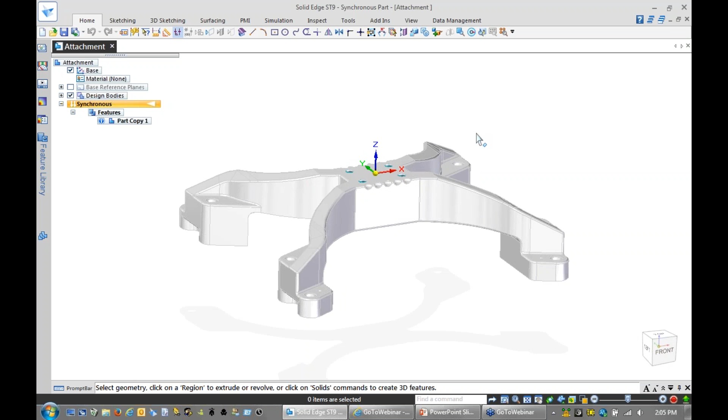This time I'm going to open a Parasolid file. Regardless where it came from, you can download it from an internet source or get it from a competitive package. You can see as we open this body, we don't have any features. It's a featureless solid body, what we call a non-parametric body.

The first thing we want to do, since we want to analyze this body, is assign material. And it's quite easy to do in Solid Edge, as you're probably aware. You can right-click on material and assign material right away, or you can go into the full material table.

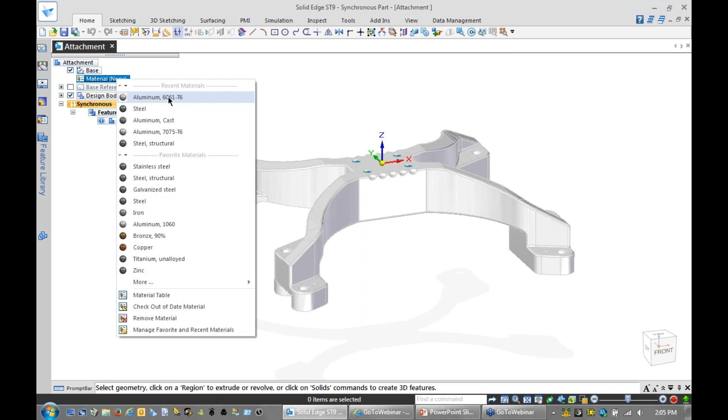Once we assign material with all the coefficients suitable for analysis, we're ready to start analyzing our part. But there's a little caveat. If you know a little bit about analysis, usually the model comes in not very prepared - a lot of small features like tiny sliver faces or geometry might have some problems the way it was built.

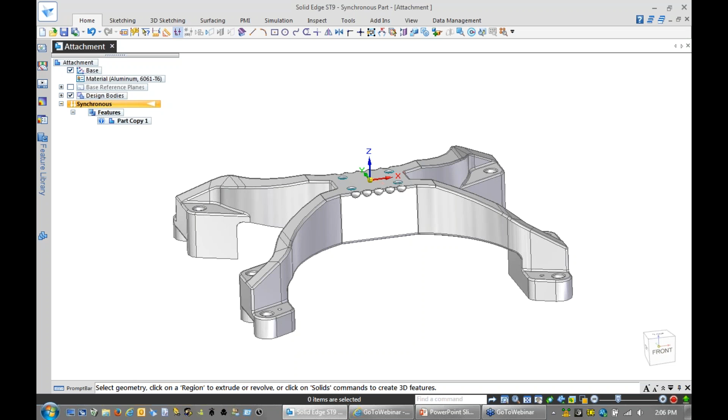Solid Edge provides excellent tools that allow you to quickly and efficiently get rid of all this extra geometry if you need to. Specifically with Synchronous technology, we can select all this extra geometry we want to get rid of and hit delete. We're pretty much done. What about all these radii around?

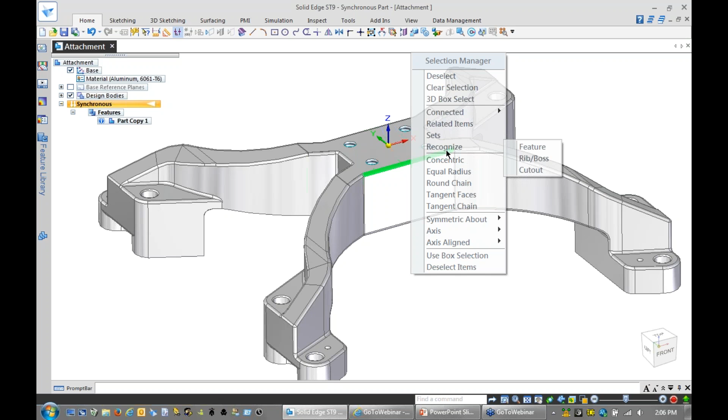Selection Manager comes to rescue. If you are familiar with Synchronous technology, you know it allows you to pick connected faces, sets, and recognize different features. Specifically, features that Solid Edge considers features, even though we don't have a feature tree, like all radius of equal value - we can select all that and immediately get rid of it in one single shot.

Another aspect of analysis is that the goal for every analyst and for engineer or designer using Solid Edge simulation should be to minimize processing time and get the geometry as clean as possible before starting the study.

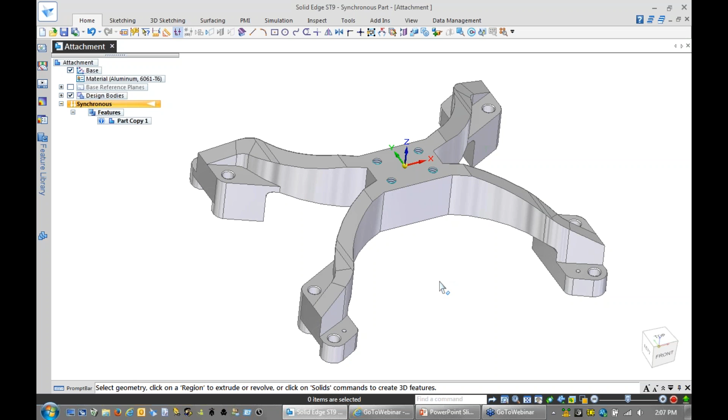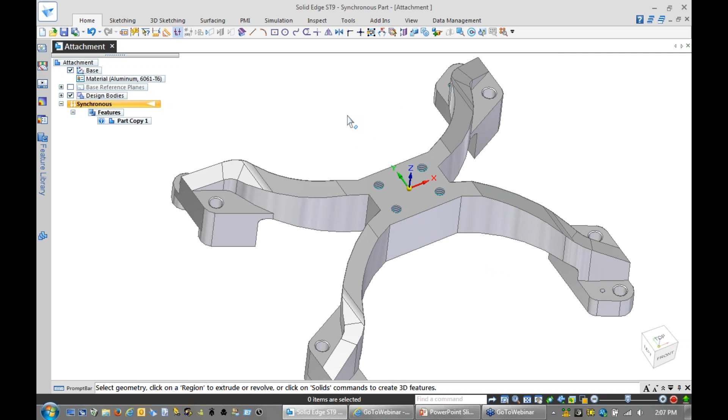If we're talking about this bracket, when you look at it, you might notice that it's symmetrical - and I mean symmetrical not only in terms of geometry, but in terms of how we're going to apply the load. If the load is applied to all 8 holes around the bracket and it's held by these 4 holes, we can consider it symmetrical in terms of analysis as well. This gives us the idea that we can analyze only a portion of it, and it's rightfully so.

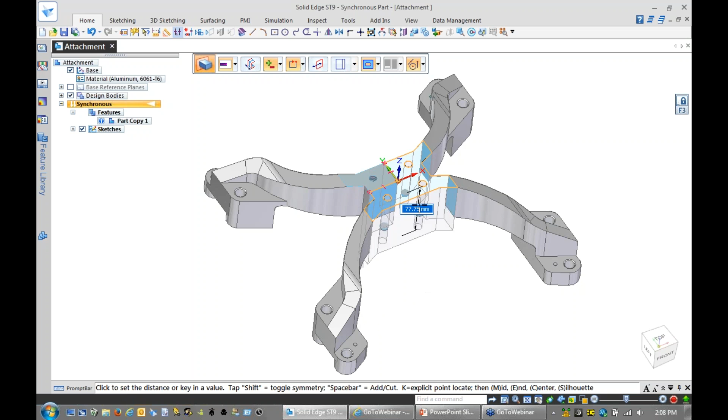So what we can do here is just analyze only a portion of this design. With Synchronous technology, it's really easy to get rid of extra geometry. I could select that region, and with the grab and go approach, you can actually switch between close and open profile. If I keep it on close, you can see when I start moving my cursor using the steering wheel, it cuts through the part. But if I switch to open profile, you can get rid of all the geometry, even though it was an open profile.

Another area is this little chamfer on each side of the hole - maybe we don't need that. Again, Selection Manager comes to rescue. By the way, if you didn't know how to invoke Selection Manager, you just hit Shift Spacebar on your keyboard, and it allows you to pick geometry, immediately taking you to the Selection Manager window.

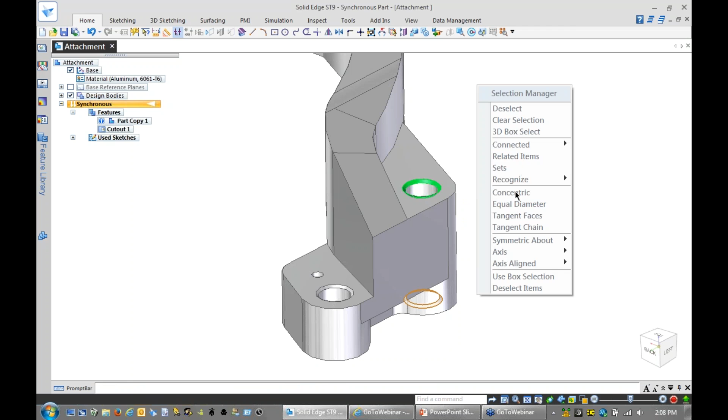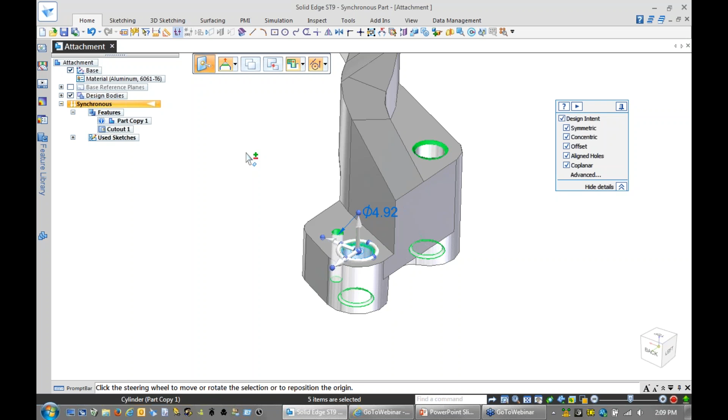So we can select concentric, and you can see we can select again using the quick pick tool. We can select this cone and again use Selection Manager to pick concentric. When we're done, we can hit Shift Spacebar again to get out of that mode, add maybe this small hole also into the equation, and get rid of it all in one single shot.

I mentioned that sometimes geometry doesn't come very clean, and as a result of surfacing modeling in some other packages, you can see that we have this patched bunch of small faces. That face is not smooth - it's kind of patched up. So we can fix it really easily.

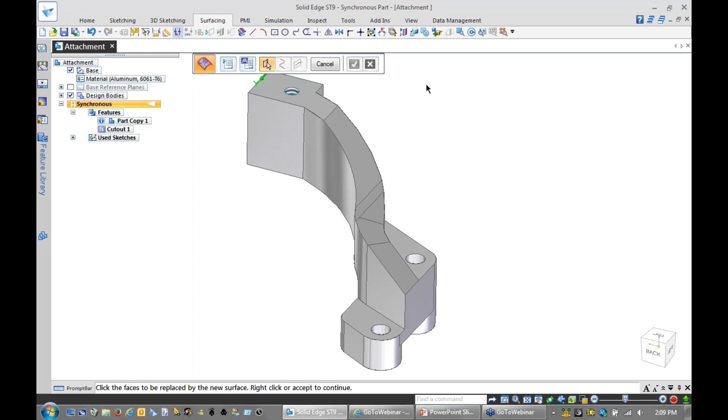Okay, and the final step—again, Synchronous technology is a very efficient way to deal with your geometry. If we want to get rid of that step, just select that small face and move it up.

So now that we've prepped the model for analysis, we can really start analyzing this design. Solid Edge Simulation is tightly integrated with Solid Edge, so right here I'm not leaving the environment—it's one single integrated environment.

Right here in simulation, I can create a new study and set up all the parameters for the study. And by the way, to give you some ideas, we can have designs analyzed in linear static mode, normal modes—which is frequency analysis.

We can do linear buckling, and also steady state heat transfer, with a combination of all of the above. When it comes to mesh type, we can have tetrahedral mesh for solid bodies, surface mesh if we're analyzing surfaces, and general bodies or mixed mode. It's a very efficient way to analyze, and I'll show you later how it works.

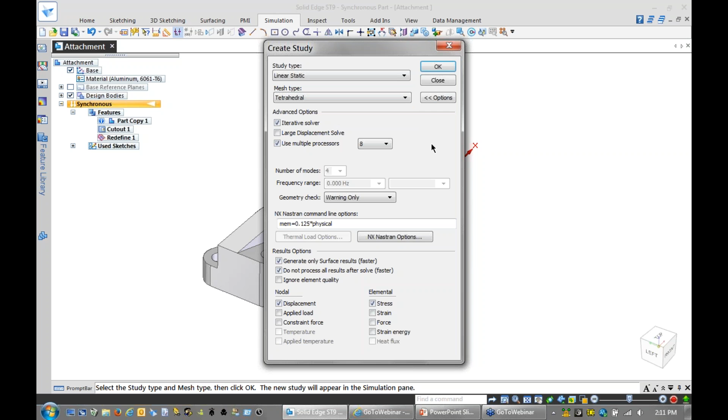For now we're going to go with tetrahedral mesh. And by the way, to increase real estate for me to work with, I minimize the toolbar up top. You can do the same if you prefer, or not—you can keep it up.

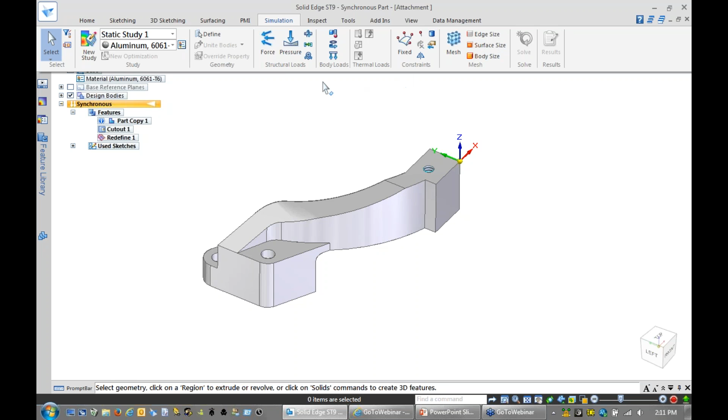The simulation tool is really easy to use. You progress from left to right, logically moving from defining loads, defining boundary conditions and constraints, then defining mesh, and finally solving. We can start with defining force.

Since we're analyzing only a quarter of the real geometry, we want to give it a quarter of the real load. So if we consider this whole bracket to be under 1,000 newtons of force, instead of 1,000 we can go with 250 newtons.

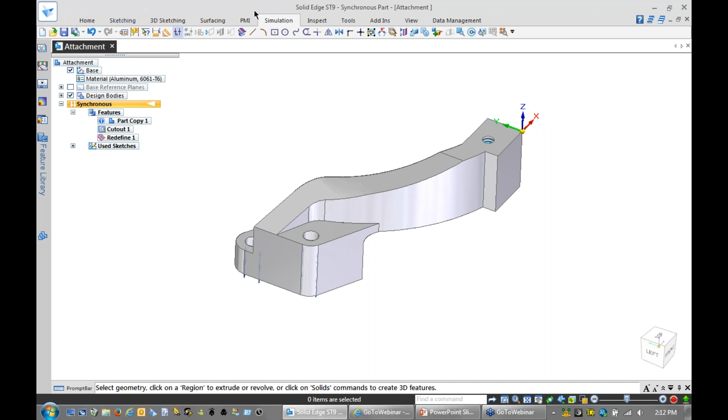Another way—simulation is very flexible when it comes to user interface. Instead of relying all the time on this toolbar, I can open the sidebar and access it this way. I prefer this way because it gives me more real estate to work with. You can do pretty much the same thing here.

We already applied load—we can see that load. As far as constraints, you can apply different fixed constraints, pin constraints, sliding along surface, cylindrical, and user-defined.

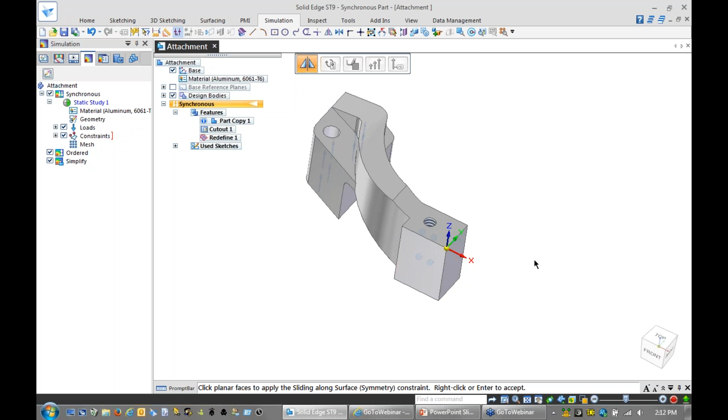In this case, we're going to fix this bracket against this threaded hole. And because we're analyzing only a quarter of our design, we need to apply constraints such as sliding along surface, because this will let the system know that this quarter of our bracket will behave and be analyzed as part of the rest of the bracket.

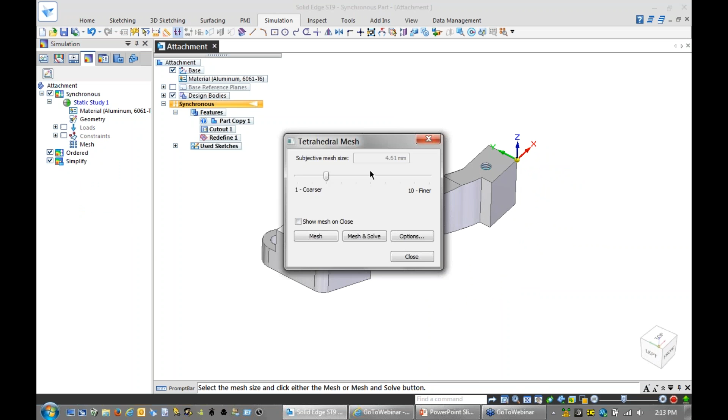This face and this face, defined this way, give the system the idea that this is only part of the whole design. Finally, we can do mesh, and conveniently the simulation tool offers you a way to mesh and solve in one single operation. If it's a simple model like this, it obviously makes sense. If it's more complex, you can first define mesh and then go and solve it.

So immediately after the system processes the study, it brings back results into the post-processing window. This is a very important part of every FEA package, and Solid Edge Simulation really shines here.

First of all, you can look at the results in many different ways. Right now we're looking at smooth contour, meaning the color mapping progresses smoothly throughout the mesh. We can switch to banded contour when it's more pronounced. Then finally we can look at element contour, where every element of the mesh is assigned a specific solid color.

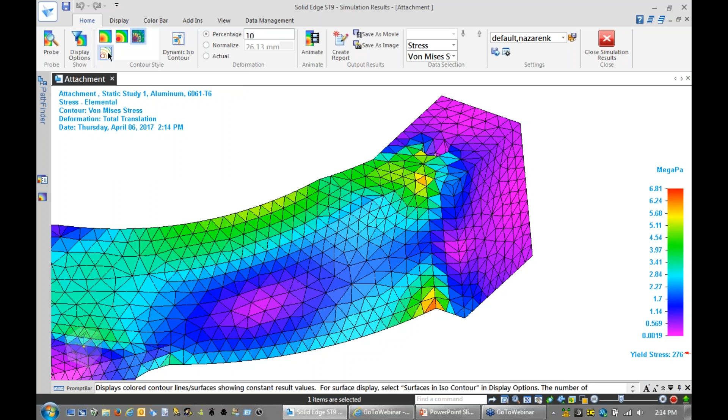And finally, my favorite—ISO contour. This gives you a really good idea. I can even switch to dynamic contour and go through results dynamically.

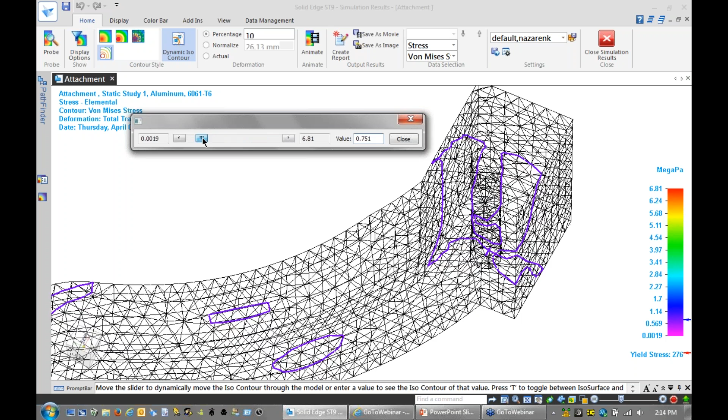So I can see where my highest stress is. As you can see, I can immediately see the distribution at the same level of stress, or I can go and see where my lowest stress is. This is a really great tool to quickly look at the results.

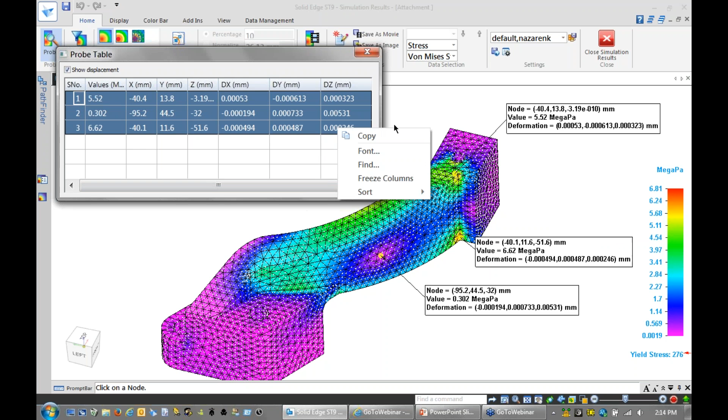Also, we can probe our design—you can select pretty much any node and include even displacement. If you turn on this option, you'll be able to get results for displacements, and all this information, by holding shift, you can select, copy, and paste into, say, an Excel spreadsheet. It's a very good way to preserve information for future consumption.

You can animate the results, because this gives you a good idea of how stress actually affects your model and how it will behave under stress. You can adjust—right now it's exaggerated, with the deformation percentage set to 10.

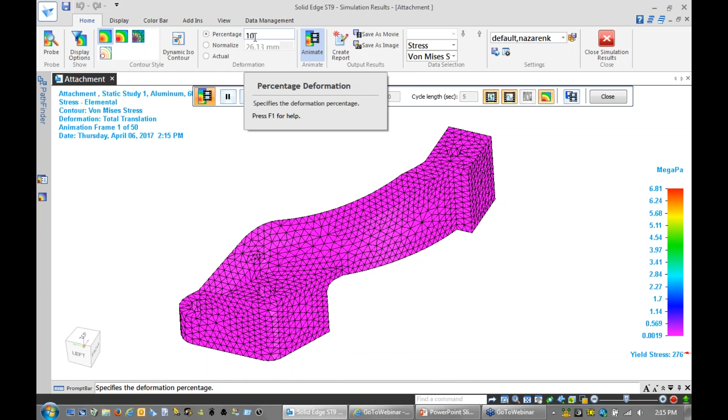You can go to actual, and this gives you actual deformation. You can save it as a movie if you want. Really user-friendly, it's really a powerful tool.

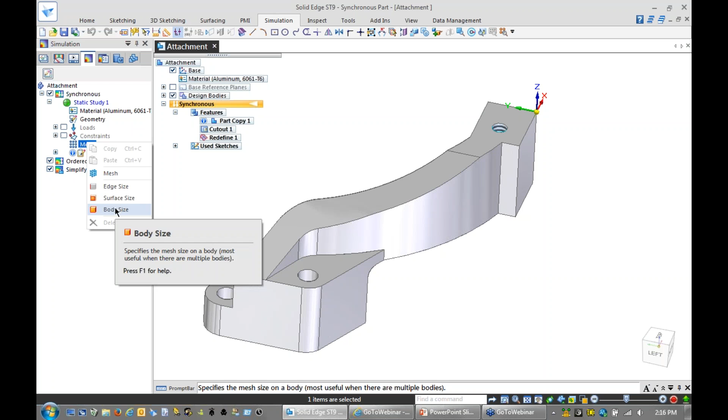So let's go back. Next step, I want to show you a more advanced technique to get more accurate results. A lot of analysts like to fine-tune their mesh, and that can be accomplished in Solid Edge Simulation as well. If I go under mesh, you'll find these extra options: edge size, surface size, body size. This allows users to fine-tune the mesh.

Let's say if I go with edge size, I can define how many elements I want along this particular edge. I can pick all the edges I want to apply this parameter on, and then define how many elements I want along those. So 24, and you can see how it gives me a nice dynamic preview if I accept it.

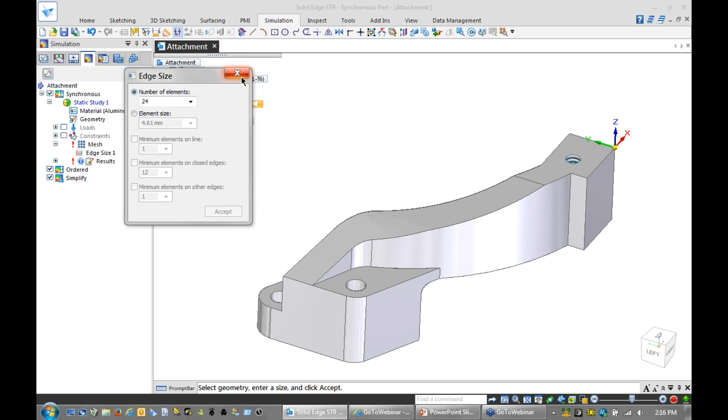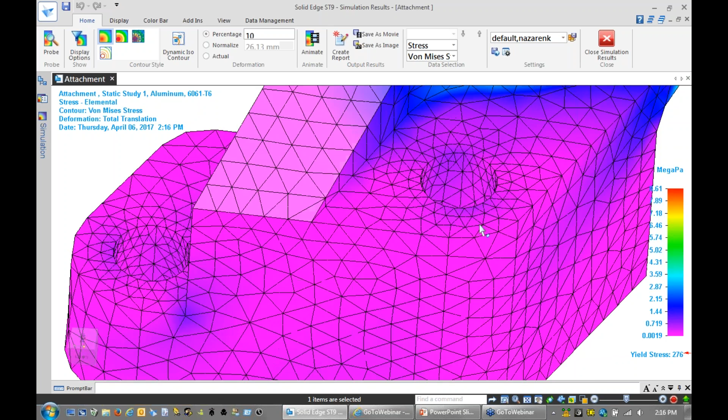So what happens now, if I go mesh and solve, it will take into account that setting first, and then it will go with the regular slider for the whole model. If you take a look at the results, you can see how nicely Solid Edge Simulation progresses from coarser mesh to finer mesh around the stress concentrator. So you can see for yourself how nice of a job it's doing automatically.

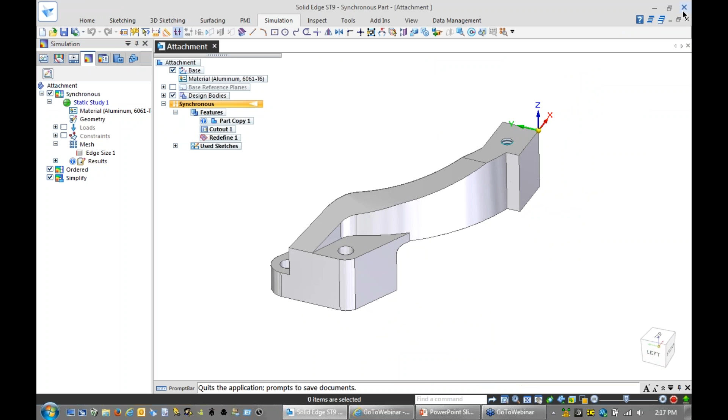Okay, so we covered some basics: how it works, how you set up your study, how you get results and analyze them. Let's go take a look at the next topic I promised to cover, a specific example. Let's close this and open the assembly.

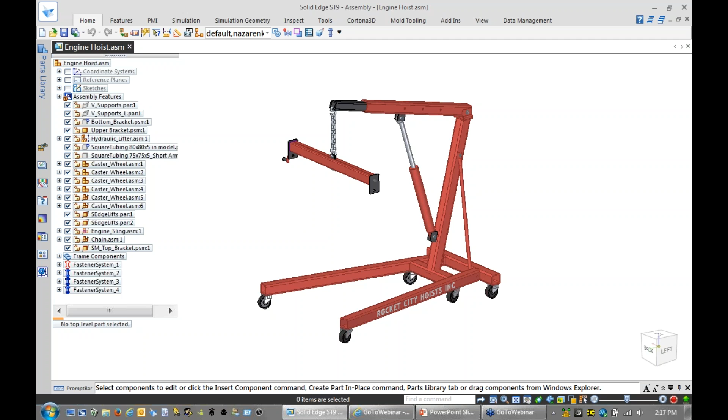I'm going to be working on an engine hoist assembly, and we're going to analyze this. Obviously, it's very important to analyze this structure because the company making this kind of equipment is liable if anything happens. So it's very important to make sure the product is reliable. Liability is a big issue out there.

So with Solid Edge, you can quickly isolate specific components on the screen that we need to analyze, in this case a member of this frame. And if we go into the environment, which is the frame environment,

simulation is present there as well. And when I create a new study, it allows me to actually do beam analysis. Instead of dealing with geometry, you will see how it happens.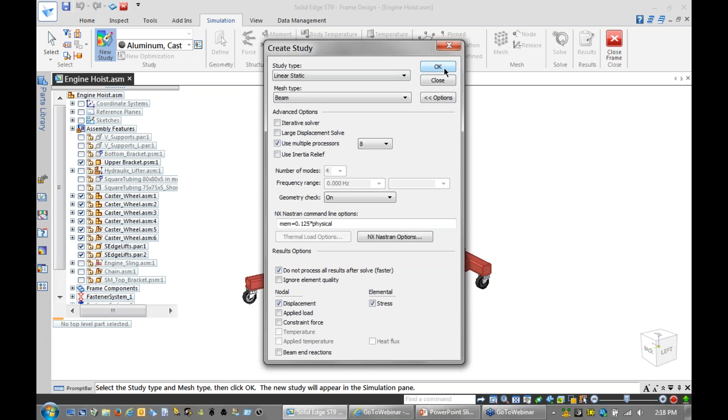When I create a new study, I can select all the members of this frame, and the system will give me this nice linear representation of every member, regardless of geometry complexity.

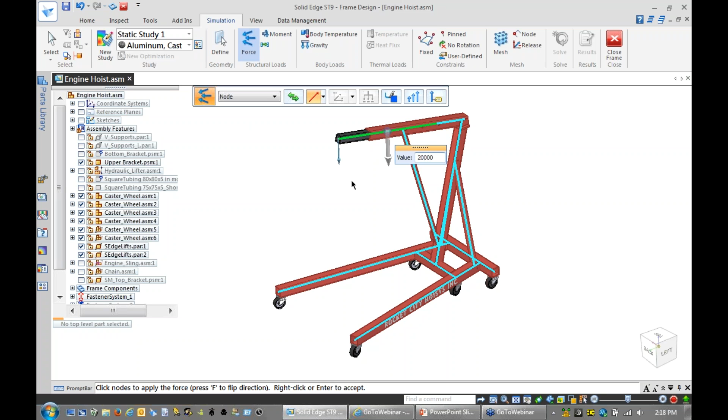So now I can apply force, and by the way, force can be applied in this case to the whole curve, distributed, or to a specific node, to the point. This is a 2-ton hoist, so we're going to apply 20,000 newtons.

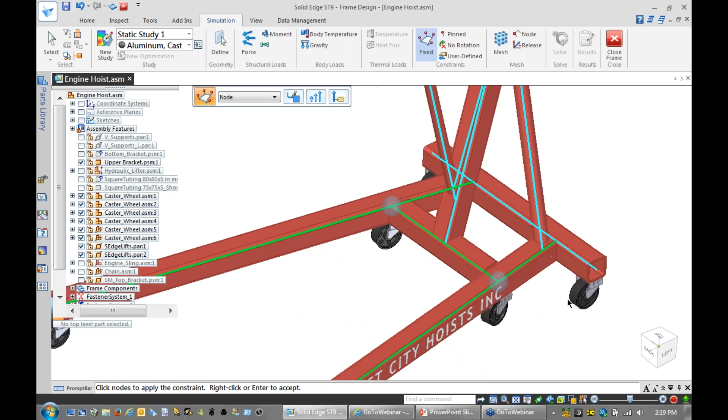And as far as fixing it and analyzing against, conveniently I can switch to node. The nice thing about the interface is you don't have to precisely select the point. If you're close enough, you can see I just get close and click, and it will automatically select points for you. So now we fix all those caster locations, and all we have to do is mesh and solve.

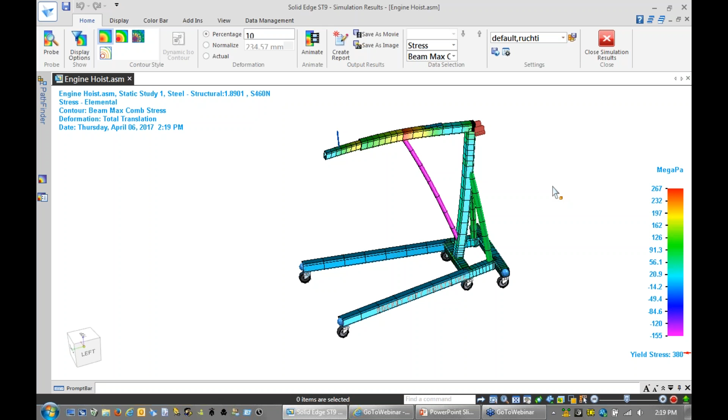And this processing time would be extremely fast because we're dealing with a beam. That's really a big advantage of using beam analysis for structures like that. Again, regardless of geometry complexity, it will give you really accurate results, and fast.

Let's animate and see how it will behave under this stress. Obviously, the way we expect it, it's going to be pulling down. And using our probe, we can quickly and efficiently get information about specific points.

So if I take a look at these points, you can see the stress here is about 80 megapascals, which is more than 4 times less than the yield stress. So we have room to negotiate, so to say. These members are over-designed.

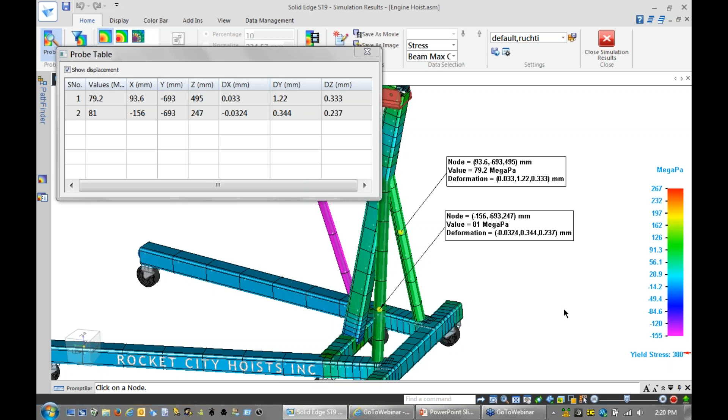So this is another side of the medal: you don't want to be liable if the product fails, but at the same time, you should be able to save money for the company by not over-designing your product. This is a great way to save money because we can go and reduce the strength of this component. Maybe we can go to smaller members here in the back.

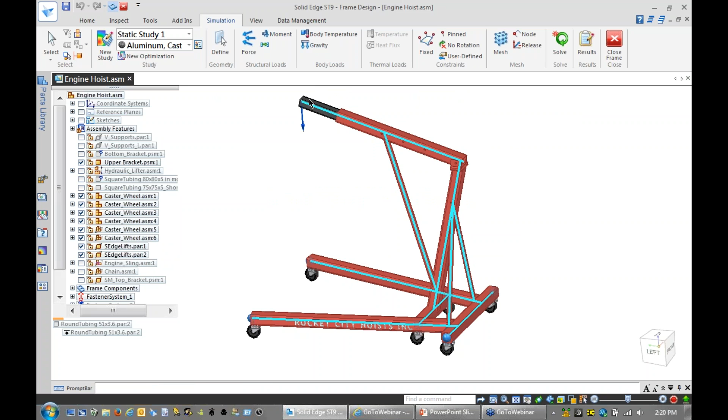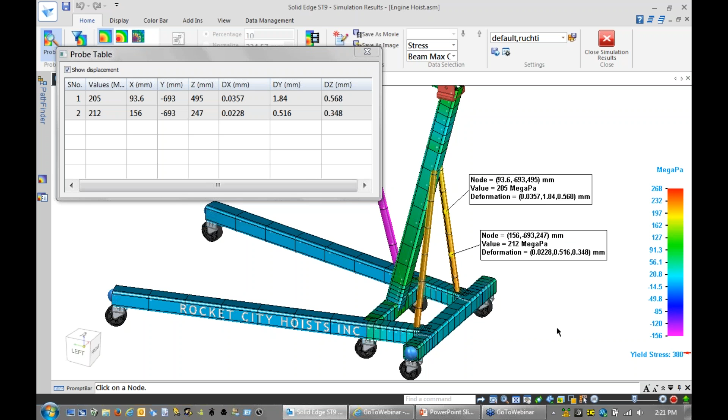Because it's one single integrated environment, it's quite easy to do here. All I have to do is solve, and it will go and solve. It knows all about mesh, boundary conditions, and the loads we set up. If we probe now, you can see just by color that we're somewhere close to 200 megapascals.

Another advantage that Solid Edge simulation brings is the ability to perform multiple analyses on the same model or assembly. Using Solid Edge functionality, I can switch the display configuration to leveler. This is another important part of the design because this is where the engine is going to be hoisted, so we want to make sure we can withstand that load of 2 tons.

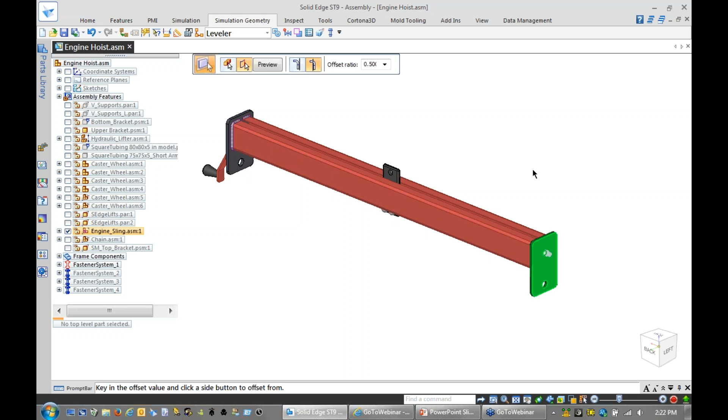Another aspect of Solid Edge simulation is, remember, we aim at efficiency - we want to spend only as much resources and time as necessary. Under Solid Edge simulation, we have the ability to extract mid-surface from sheet metal parts right on the assembly level. We don't have to go into each single component - we can do it right here on assembly level, and then do the same thing on the other side.

So now if we isolate, let's hide this component that we don't want to see, and you can see that the system extracted mid-surfaces. They're available right here on assembly level.

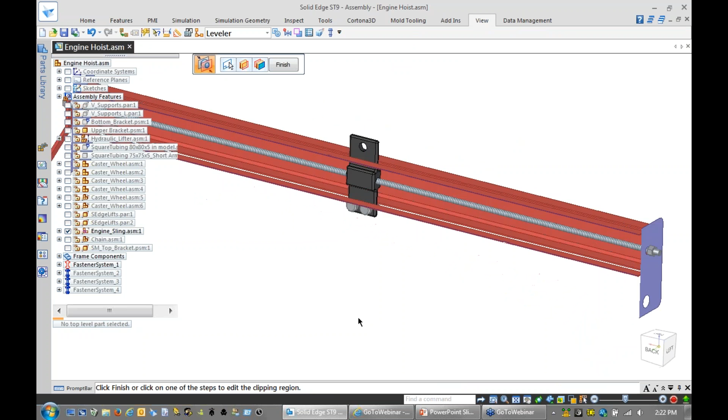Before I start setting up my study, I'd like to show you how this mechanism works. If we take a peek inside, you can see we have this threaded rod that goes through the adjustment bracket. If that rod gets too much deflection, the whole mechanism won't work properly. So our goal here is to, while preserving the strength of the structure, minimize the travel deflection for this mechanism.

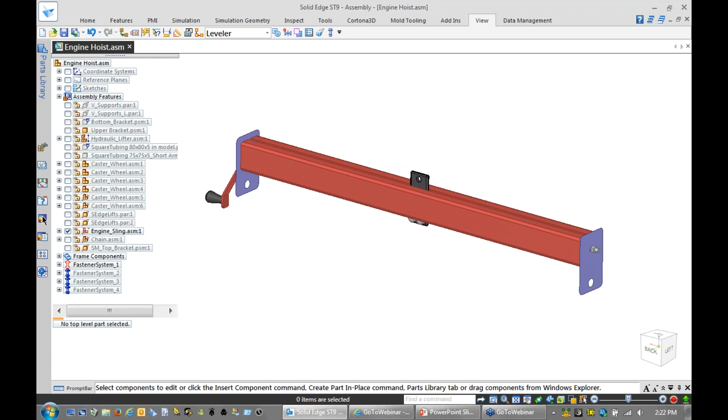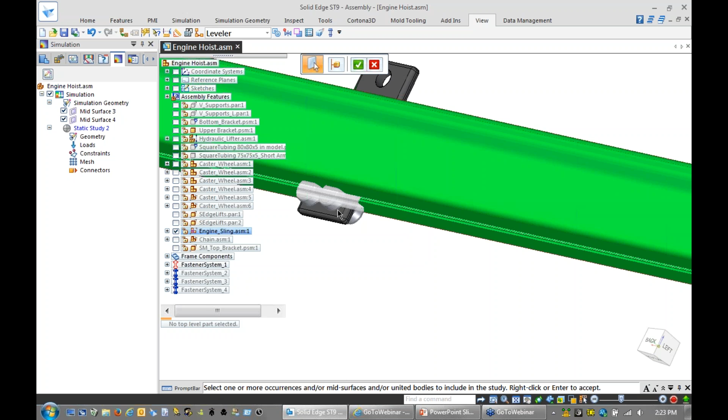Same idea - I can open the sidebar and start creating a simulation here. New study - this time I'm going to use mixed mode because I have some sheet bodies as well as regular models. Then I just select all the components relevant for our study: these 4 components, the beam, 2 side brackets, and the supporting piece.

So let's go and apply some loads. Before that, I want to show you that those mid-surfaces we extracted on assembly level - Solid Edge simulation is smart enough to know the material assigned to them. It knows about thickness, so all this is done automatically for you. You don't have to go and manually assign thickness and make sure material is assigned - it all happens automatically.

So let's go apply loads. Obviously we're going to load with the same level that we used for the whole hoist. Conveniently, you can apply load to face, edge, point, and feature, and we're going to use that in a little while. But for now, I'm going to pick edges.

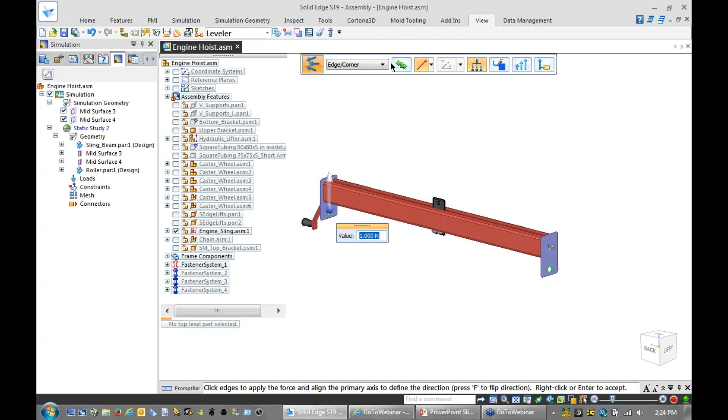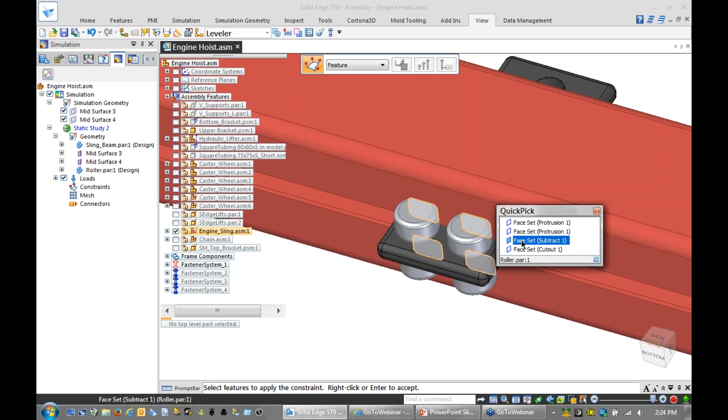Let's switch the direction. Again, as I mentioned, we're going to assign a load of 20,000 newtons. As far as constraint, we're going to constrain against these 4 little faces. Conveniently, I can use feature, and when I select that geometry with quick pick, I'm able to cycle through and pick those 4 small holes - probably cutouts. Think about it - you have the ability to dive into a component, pick a feature, and assign constraint to that geometry.

Now, because it's an assembly, we need to tell the system how these components interact with each other. Connectors come to the rescue here. When we go with connectors, you can have different types. We can do a manual connection, meaning you pick manual components that you want Solid Edge simulation to know how they interact with each other, or you can do automatic connection - that's what we're going to do.

You can also do bolt connection. It allows you to avoid modeling actual bolts as part of your study - it speeds up your study and you don't have to have bolts modeled. You can mimic it through bolt connection, and you can even preset pre-stress with a force.

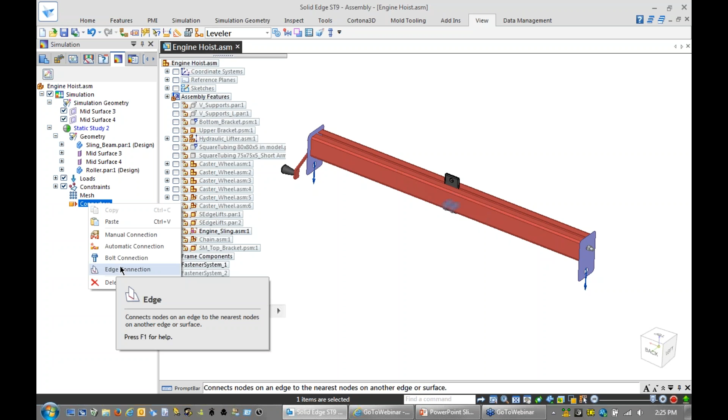And edge connection, when you are able to connect edge to a face, it's very, very important when you're dealing with the sheet bodies, when you analyze sheet bodies. So let's go with automatic connectors. Because we extracted mid-surface, and obviously there is a gap, we want to define search distance slightly larger, like 5 millimeters, and then select all parts in this study.

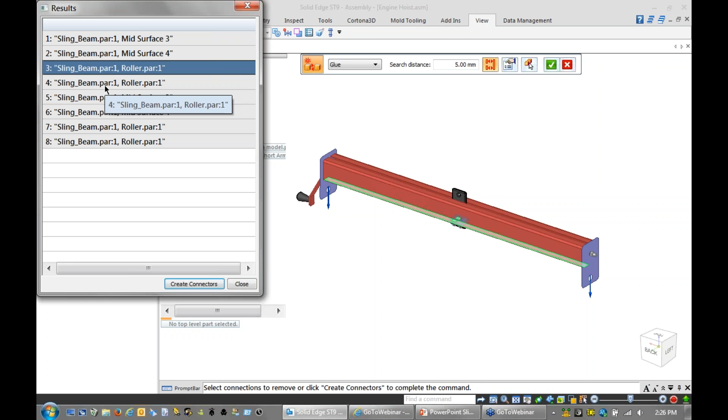And when we accept that, conveniently Solid Edge simulation gives us a list of all the connectors that it finds based on search tolerance. And you can walk through and you can see the system conveniently highlights and shows you graphically which one is which. If you don't like some of them, you can right click and delete. But in this case, I'm going to accept and create all those connectors for these components.

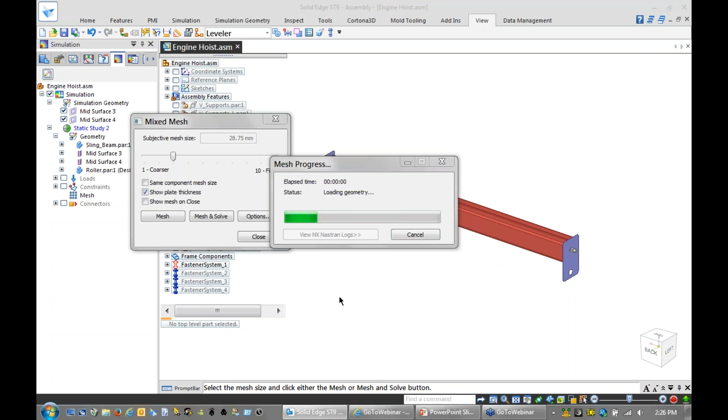And what's left to do pretty much? Yeah, let's turn off these loads and connectors. We don't need to see that graphics. And then we can just do mesh and solve. And the system will go and solve this assembly for us, and you'll see that the processing time is really fast because part of this assembly is sheet bodies, not solid bodies.

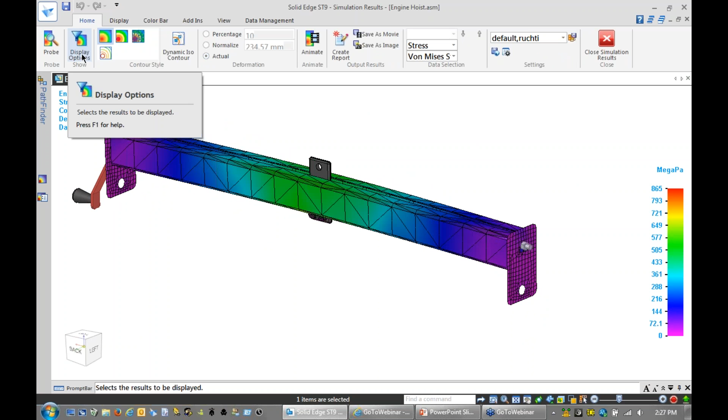We can animate this, and obviously I want to switch to visible results. Excuse me. So let's switch to actual results. And while I'm at it, Solid Edge offers you in the post-processing window different display options where you can turn on plate thickness. As I mentioned earlier, we're interested in displacement. So let's go with displacement and animate this in actual mode.

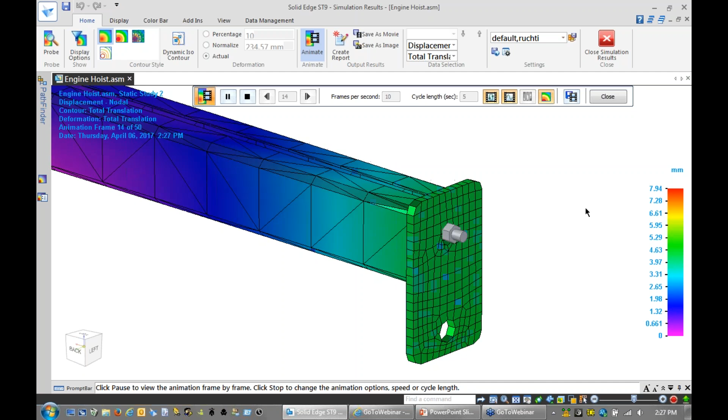You can see even in actual mode, the displacement is about 8 millimeters. That's probably too much for this kind of mechanism. As I mentioned, this threaded rod is not going to work properly with the adjustment bracket. So what we need to do is lower the displacement and stress accordingly. I could just apply a different configuration, and as a matter of fact, let's do that.

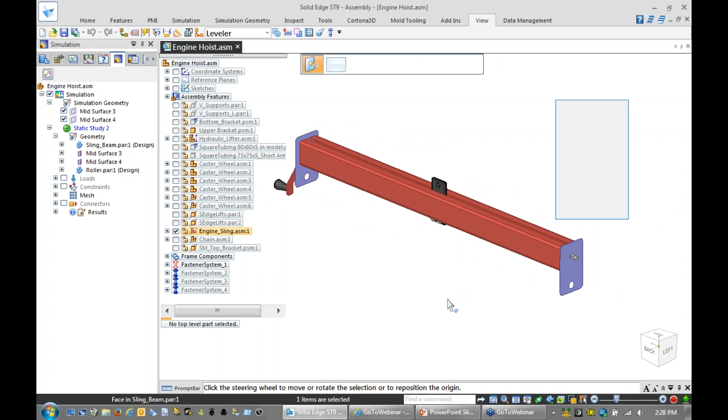Even though I'm in assembly, I can select the face from that part that I want to adjust, and conveniently I can adjust it from assembly level. With synchronous technology, you can just type in a new value because that dimension was part of that design part, and I can even adjust the thickness. Let's say instead of 2 millimeters, let's go with 3 millimeters.

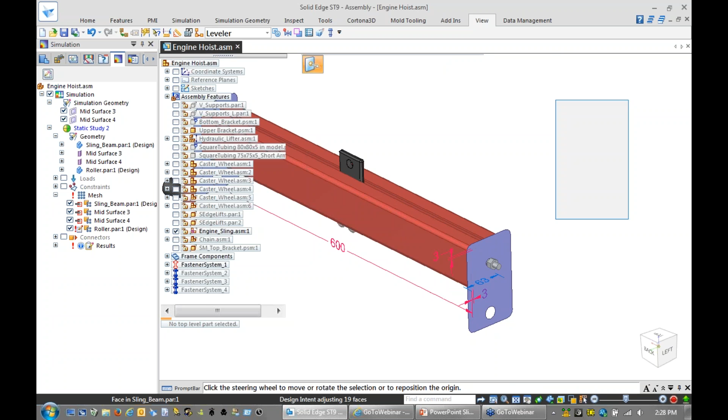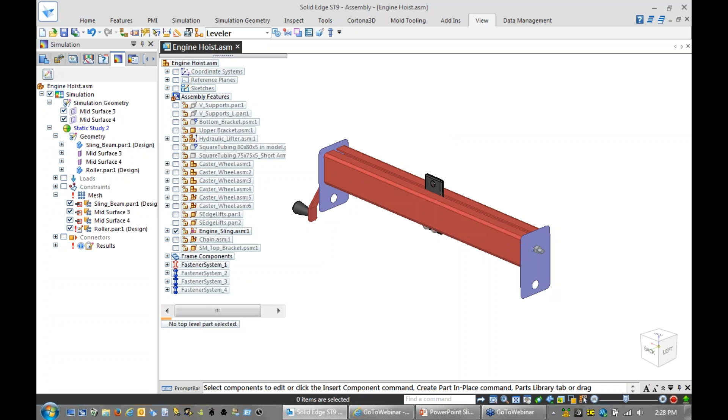So this is how quickly, because it's a single integrated environment, Solid Edge simulation is actually part of Solid Edge. This is how easy it is to change geometry and rerun analysis. And you can do it over and over again, but instead I'm going to show you a more efficient way to do that. If you have at least one study in your study navigator, you can right click on it and say, let's do optimization. So you go through an easy to understand setup wizard.

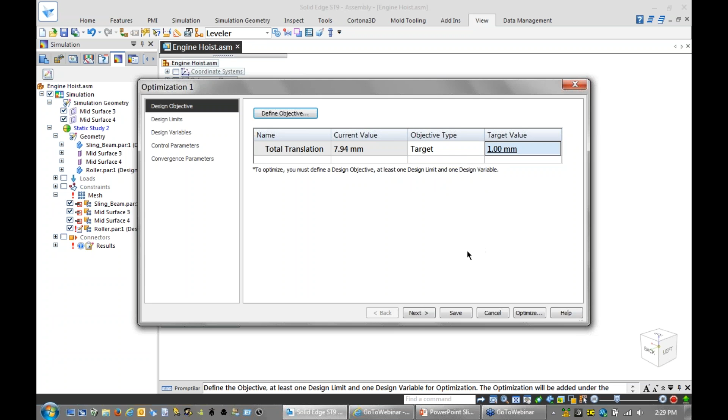And our objective would be displacement in this case. We have right now about 8 millimeters of displacement. By the way, you can set up minimum, maximum, or target value. In this case, I'm interested in target. So I want to make sure it's 1 millimeter or lower. And the next step, we're going to set limits, what we're going to control it with. We're going to take a look at stress because we want to avoid any liability issues. We want to make sure that stress is below a certain level, let's say 190 megapascals.

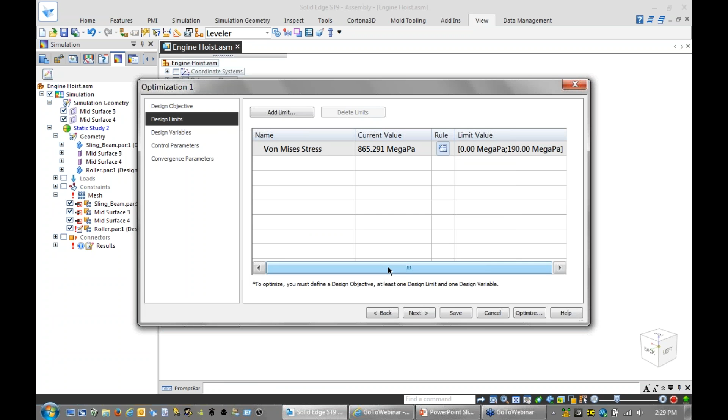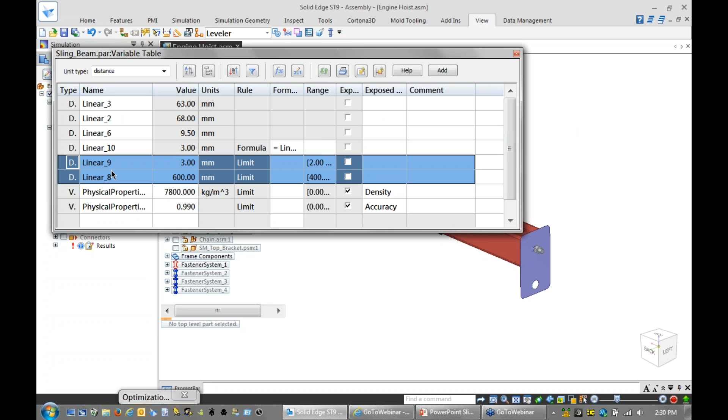And finally, let's move on to the next step. What are we going to be adjusting while we're arriving at the optimum solution? We're going to be adjusting variables that control geometry. We can adjust variables from the top assembly, or conveniently we can dive into the component. I'm going to select this member and pick two variables from here, thickness of the wall and overall length, and add them to our wizard window. And by the way, the range that was defined in the variables comes through also.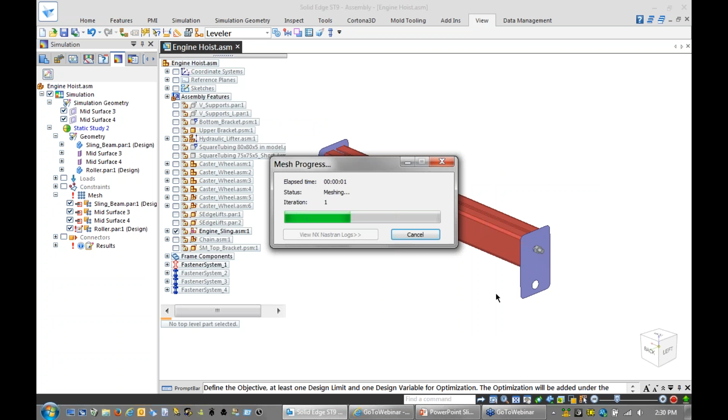And finally, you can define how many iterations you want to go through. This is a demonstration, so if you really do analysis, you might go with a higher number, but for now, 4 is okay. And I say optimize. As I mentioned, it's an easy to understand, easy to follow wizard. Once you set it up, you can go grab a cup of coffee, and if you happen to be in front of your monitor, you'll see how it changes the thickness of the member and overall length of the member, trying to arrive at the optimum solution.

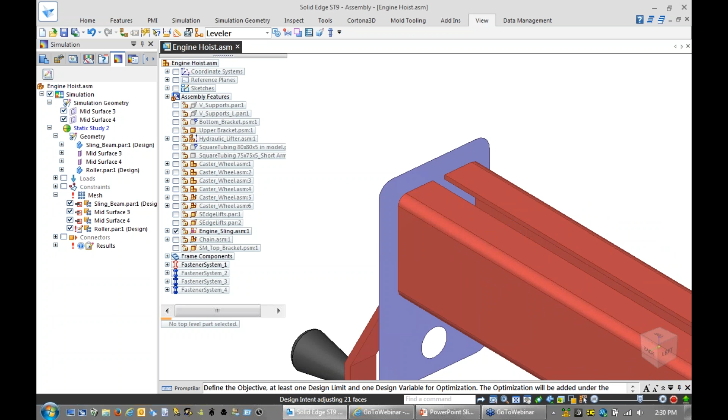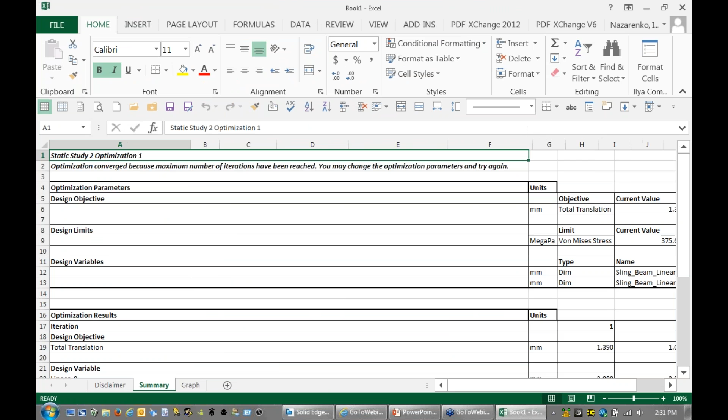So when you come back with that cup of coffee, Solid Edge simulation will present you with the final result. And to make it actually recordable and efficient in terms of reuse later, you can take a look at a summary of these iterations. And we take advantage of Microsoft Office in this instance. So Solid Edge takes all these results and pops them into an Excel spreadsheet. And obviously the last iteration, this is the one we are looking at.

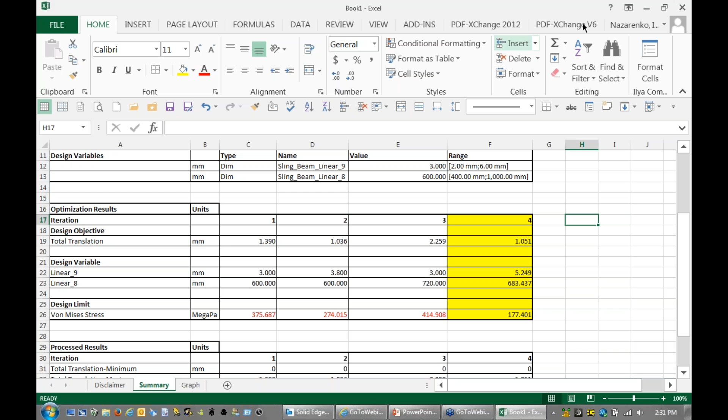You can see that it went through some iterations, some of them were ridiculous, but we arrived at the desired value. We have the total translation slightly over a millimeter, and it gives us 5.249 thickness of the wall for that member and 683 and change for the overall length. So obviously stock is not available in these decimals. So we need to adjust to, let's say, 5 millimeters and maybe 650 for the length to make sure. But you can save the spreadsheet for future reference or share it with anybody and so on.

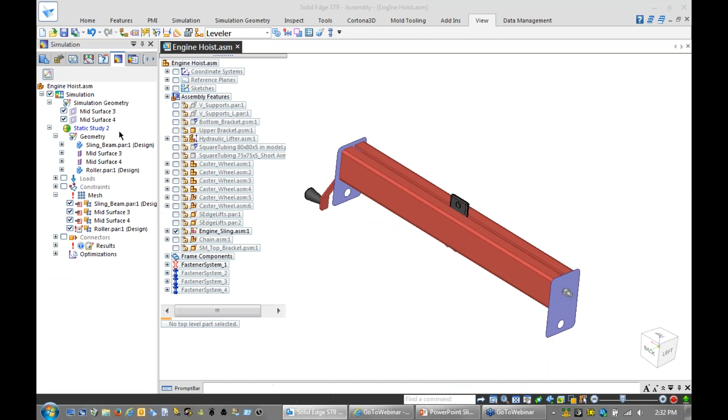So again, because it's one single integrated environment, we're going to select parameters right from the assembly, type in new values, and change even the wall thickness, exactly 5 millimeters for the member. And rerun analysis. It's easier, just solve, because remember, it knows all about boundary conditions, loads, mesh options, and whatnot.

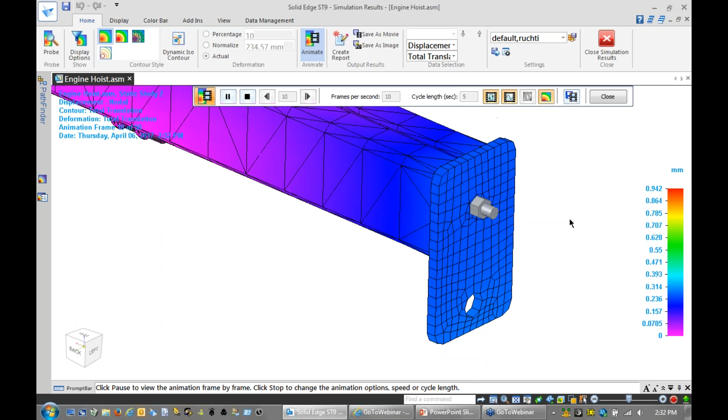And if we take a look at displacement, so let's take a look at actual displacement again. It's 0.942, so it's lower than 1 millimeter. Let's animate it and see how it works. So you can see it barely moves, so we arrived at our optimum solution.

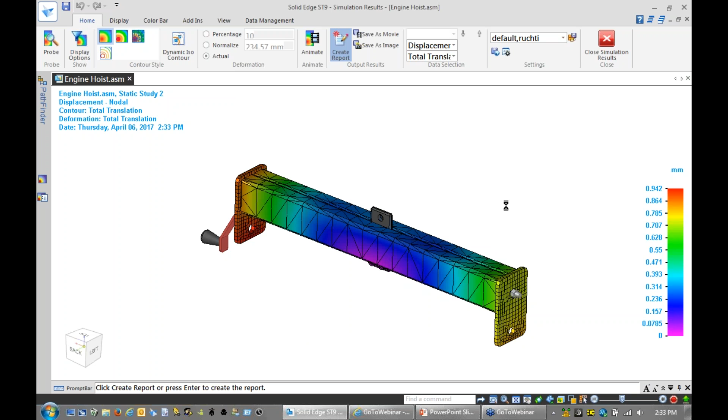And if you want to have it recorded or have some reference for later to show to your boss or share with an organization or customer, you can create a report. With one single button click, you'll be able to create a report and capture it in HTML-based format or Microsoft Word format. So when you hit create report, it captures all the information, starting with material properties, all the loads, and you have a nice table of contents.

Let's say you can take a look at loads, or you can take a look at the results. Let's say total translation, that's what we arrived at. And this is really a powerful way to capture or document your design, your study. And you'll be able to share this information, again, archive it, share with anybody within an organization or outside.

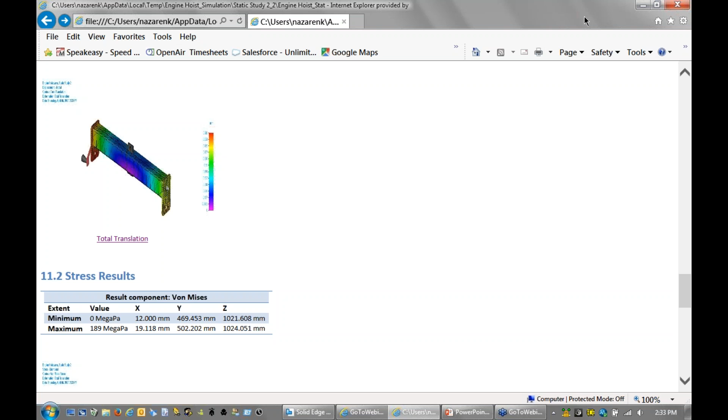So coming back to summarizing what we just went through. First of all, I showed you how Solid Edge simulation, being tightly integrated with Solid Edge, can take advantage of Solid Edge tools, and in particular synchronous technology, to prepare data for analysis, get rid of any unwanted sliver faces, small faces, and fix geometry if required. Simulation is fully integrated, as I mentioned, which means it's one single environment, one click away to go and change your geometry.

It provides a multitude of analysis types, so you can perform stress analysis, you can perform buckling analysis, you can do modal analysis, and you can do heat transfer analysis, steady state heat transfer analysis. And finally, built-in optimization is a great way to arrive at the optimum solution while you have a cup of coffee.